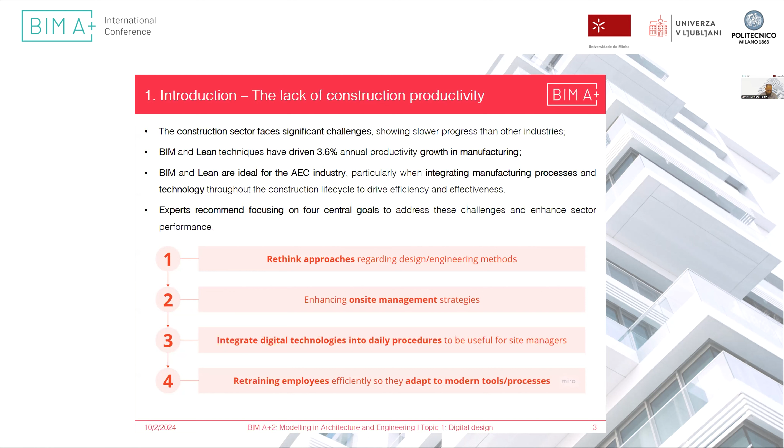Regarding the BIM approach and lean construction techniques, a keyword used in this dissertation is mainly constructability.

It is about integrating the 3 main constraints in our sector, which are quality, cost, and time, into our planning, our designing, and our execution projects.

Using constructability was the main approach I used to integrate these 3 main elements of the triangle that I used here.

The first is building information modeling integrated with the last planner system, or LPS. It is the approach used in site construction, and it also integrates building information modeling with the line of balance technique.

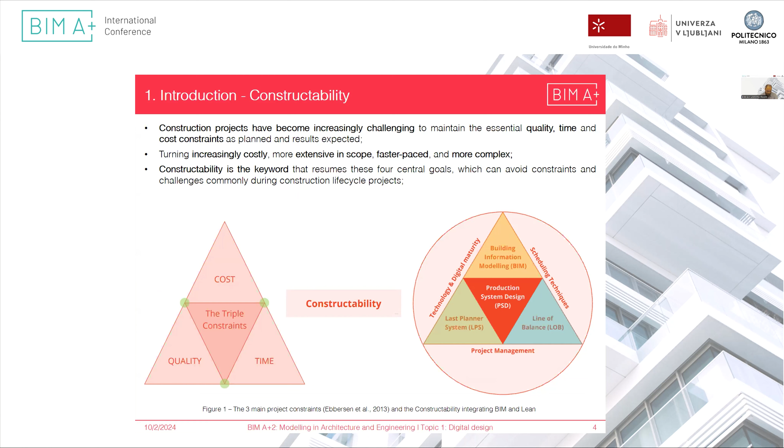So these integrations were designed as an approach understandable as a production system design here.

To start developing this dissertation, it was necessary to do the diagnostic and understand the motivation of the project.

The first reason is that the renewable energy sector has become the fastest growing power source, and the photovoltaic solar systems have been pioneers in production efficiency.

The combined use of BIM and Lean methodologies in solar panel projects offers substantial advantages, especially in our sector. The diagnosis that I did with the teams in site constructions resulted in this workflow system divided into 5 main points.

The first lack was the lack of effective use of visual management systems and tools. Solar panel design was still developed using CAD format and files.

This is not an issue in itself, but it is something regarding information, a lack of information in their attributes also.

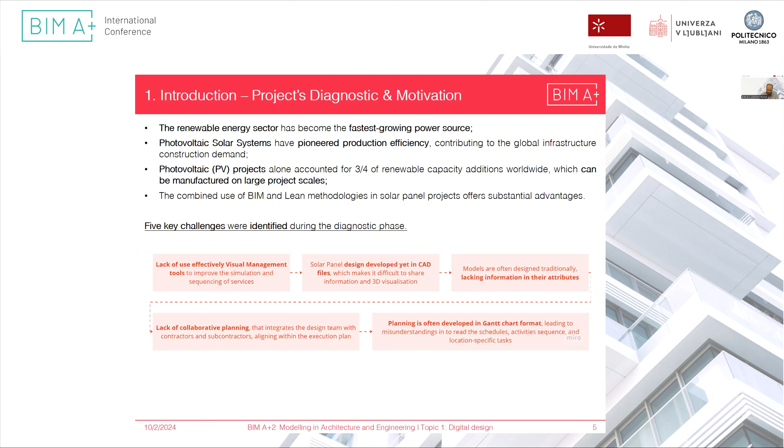The next point is the lack of collaborative planning, and the last one is that planning is often developed in the Gantt chart format, which is also not an issue itself, but...

...site construction managers take a while to understand the sequence of execution of the panels.

So I created the objectives for this dissertation. The first is to integrate BIM for simulations with project scheduling, enhancing productivity and execution of solar panels.

And to implement lean construction techniques in site construction also, retraining the site managers with daily and weekly routines.

Three main specific objectives were also developed: develop the production system design, including a comprehensive list of PSET codes organized by level and location.

What location? Because the construction is large, so it's necessary to divide the construction site into smaller pieces.

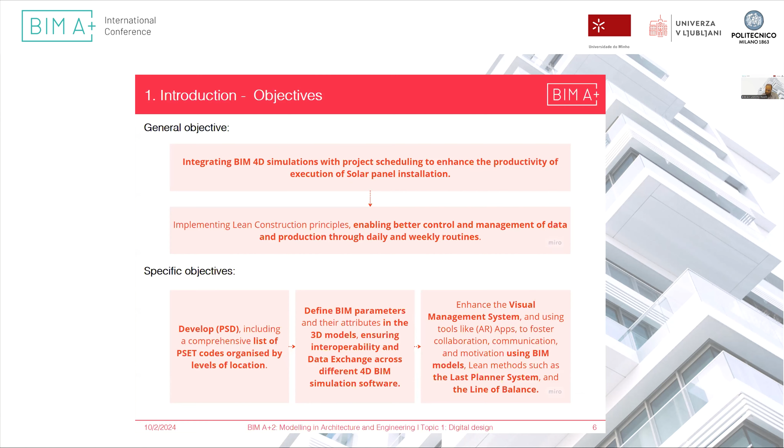The second one is defining BIM parameters, and the third one, enhancing the visual management and digitalization maturity. For the literature review, I found more than 100 documents regarding the integration of Lean and BIM, and 78 papers were used to develop my literature review here, to understand some arguments and gaps still appearing in our sector. Five keywords were used to maintain my dissertation: BIM 4D, lean construction, line balance, and solar panels.

The first approach that I use is the last planner system, as I said before. It is an approach to involve a team to be collaborative, not an individual - building a planning using the team, but not alone.

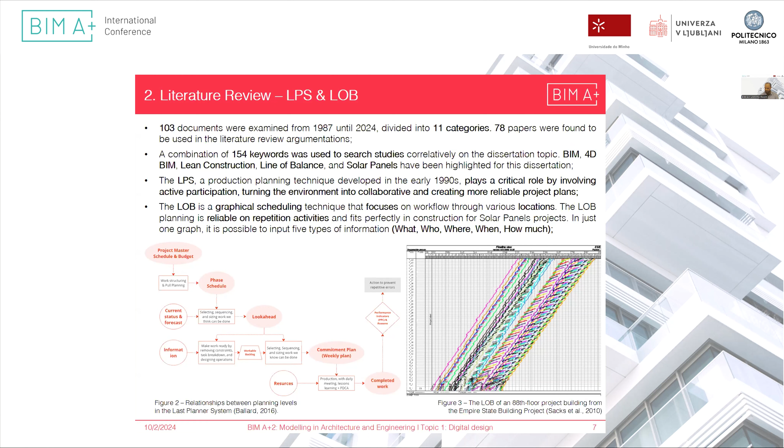The second approach was the line of balance, as you can see in the second picture. It is a graphical technique focusing on a workflow divided into locations. In just one graph you can understand the sequence of the executions on site, also the rhythm, and information about the quantities, who is doing those activities, and when.

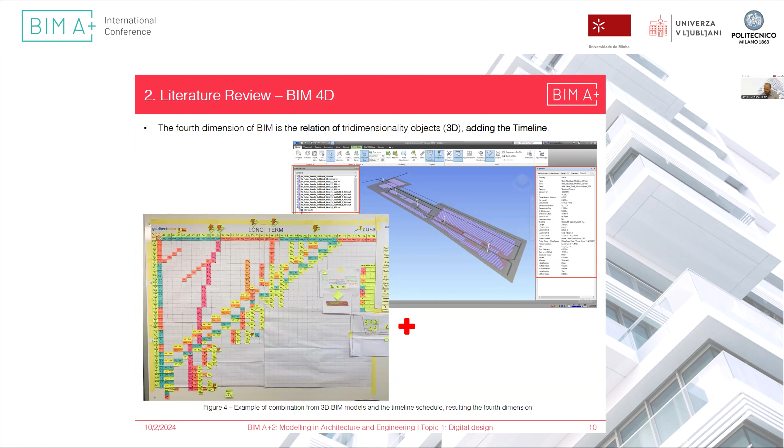About the literature review for BIM 4D: it is the relation of three-dimensionally BIM or 3D objects, adding timeline schedule. As you can see, we have the 3D BIM viewer here and the schedule here. It is the combination of those two approaches.

About the methodology: it was developed in 3 processes, divided into 4 phases. The first phase is the development of the PSD, regarding the development of the WBS, the duration of the executions, the sequence, the zones definition and planning. The second phase is regarding the development of BIM models, divided into 4 topics: modeling, detailing including the parameters and exchange data, and understanding parameterization and interoperability.

Phase 3 is regarding the development of 4D BIM - this is linking the 3D BIM model with the timeline schedule, including color codes in the objects, to understand the visualization and the sequence of execution of solar panels. And the last phase is the application in the site construction.

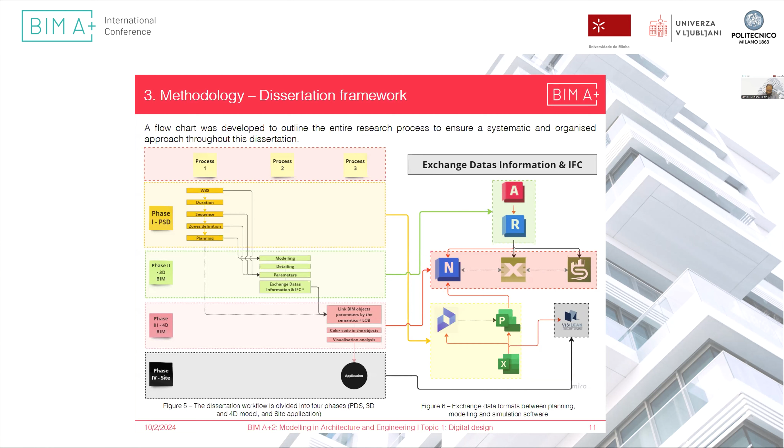In the second picture, we can see all of the software that I used in this dissertation: AutoCAD, Revit, Navisworks, Excel Manager, Synchro 4D Pro. For planning: Prevision, which is from Brazil, Microsoft Project, Excel, and the last one, VisiLean, which is project management software that we used after implementation.

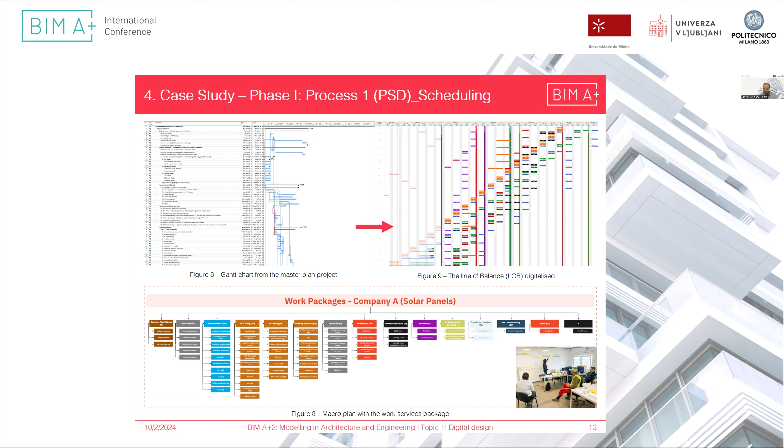The case study phase 1 is the development of the PSD, which included the scheduling. We took the Gantt chart and developed the line of balance to understand the difference between them. There are more than 100 lines in the Gantt chart, and then we put it into the line of balance in just 50 lines, as you can see here.

Then we did the workshop using the last planner techniques in the site construction. The main and key point of the last planner system is the collaboration - it is not only me doing the scheduling, but all of the teams.

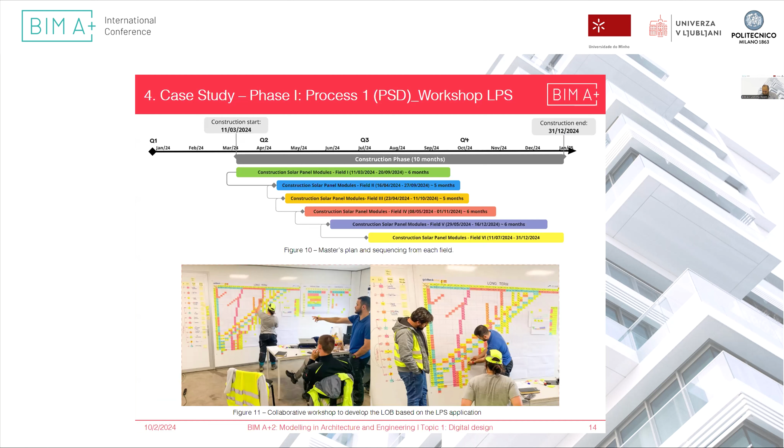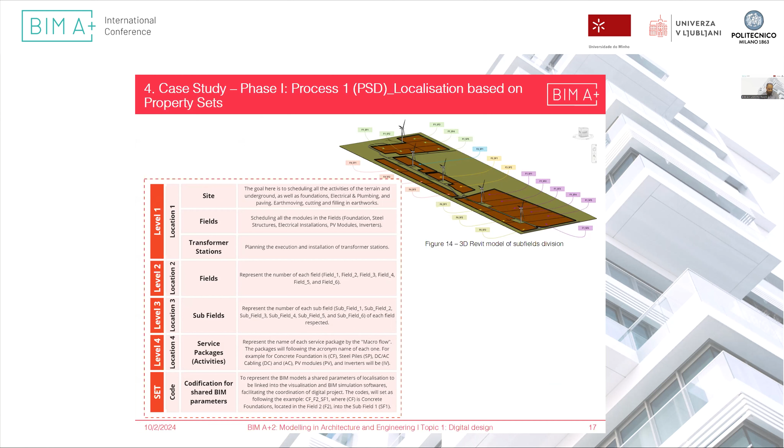After developing the line of balance and the sequence, we divided the site construction into small fields to understand it was reasonable and real. Then we started understanding the location to include in the PSET codes, divided by levels. Level 1 is about the site, the fields, and the transformer stations. Level 2 represents each field. Level 3 is the subfields. Level 4 is the service packages or the activities. And the last one is about the set codes.

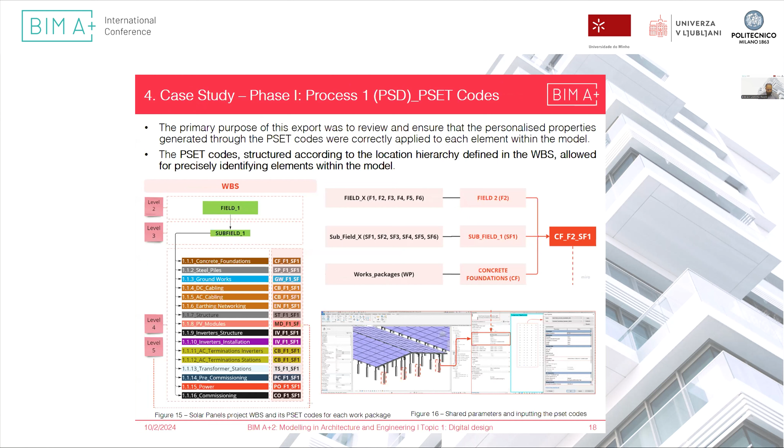So the PSET codes, after developing the WBS, each package has its own PSET code. For example, we have here CF F2 SF1, which means CF: concrete foundations, F2: field number 2, SF1: subfield number 1. This information was inputted in the BIM models in Revit.

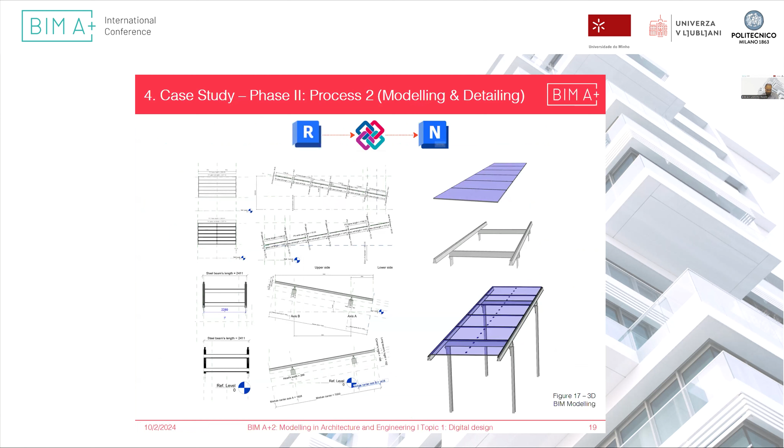In phase 2, we're doing the modeling and detailing of the solar panel project, with parameterizing, modeling and detailing. Here is the exchange and interoperability to understand the information we put in the PSET codes in Revit, and how it's organized so site managers can easily understand, just by clicking on the 3D BIM, the location where the solar panel will be executed or installed.

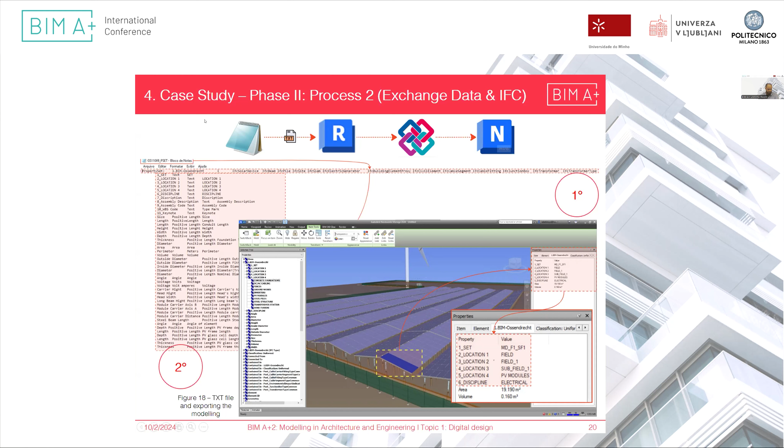This configuration was also used in the Notepad, exporting a TXT file, and after that, including the Revit file to export it as an IFC.

Process number 3 is auto-attaching using rules. The main point of the dissertation is not doing the linking between the 3D BIM models manually, but doing automation with just a few clicks using rules. We developed the simulation in Navisworks, and in just 10 minutes I did this with the site managers.

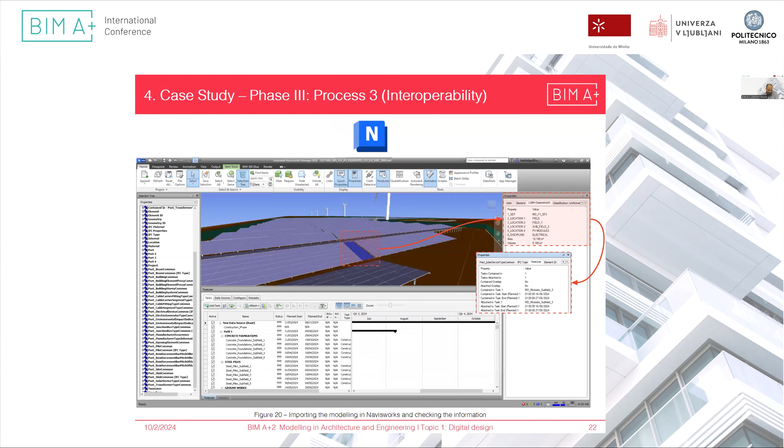Here it's about interoperability, to understand the information that was included in the BIM models, and how it still appears in the simulation software. This is from Navisworks.

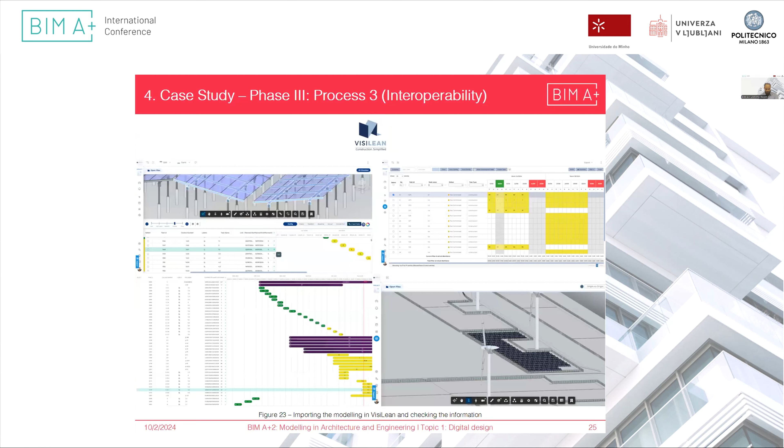And here it's from Synchro Pro 4D. Here is from Bexel Manager also. And the last is in VisiLean Construction Simplified, for the project management system.

Here we have the simulation developed for the site managers. We also developed virtual reality applications for installing solar panels, helping the workers understand the location of each solar panel and each module.

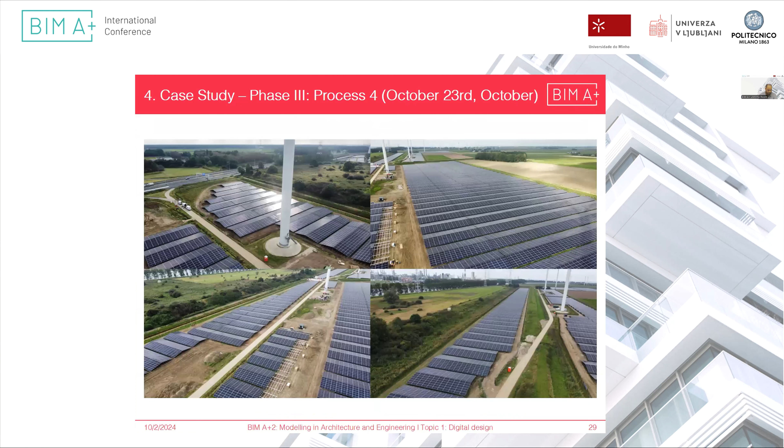Here are some pictures regarding the workshops that we developed. It was developed on site over 2-3 consecutive weeks, and the director was also involved, which was really important. These are the 4 pictures we took last week, showing the development and installation of solar panels — it was really incredible because it was on time.

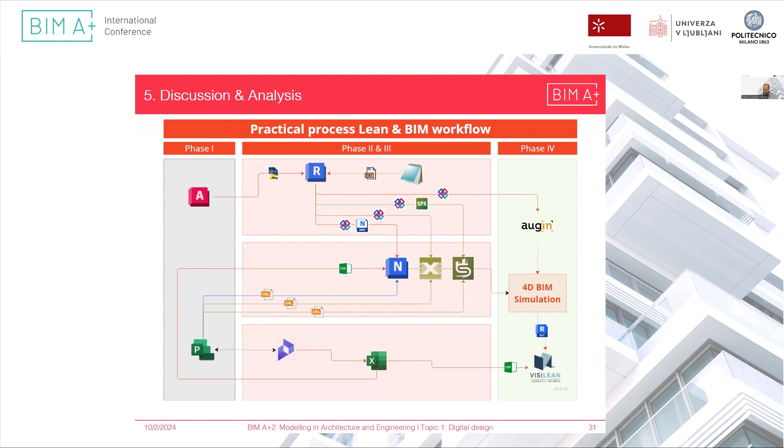The last one is the workflow that I developed with the project team. This is really helpful for them to understand the interoperability and exchange of format files, because these companies didn't have any prior file regarding BIM. It was the first project we developed using BIM techniques.

As a conclusion, firstly is about the 4D BIM impact on execution, which is incredible because the simulation enhances the productivity of the workers, implementing more than 900 to 1,400 modules daily.

With the simulation, it enhances understanding and visualization of each component of the modules. Parameters: early establishment of shared parameters, so now the company has parameters that are cohesive for the 4D models. The third one is synergy between BIM and Lean — BIM contributed to enhancing the visual management system and better planning.

Also, the Lean principles help optimize the internal process and reduce waste. As I said, they increased productivity to more than 1,000 installed daily, improving organizational efficiency.

What's really important here is that not all Lean techniques or BIM approaches are necessary for this type of project. For this project, some of them were used, like, as I said, for Lean-based it's regarding LPS and LOB.

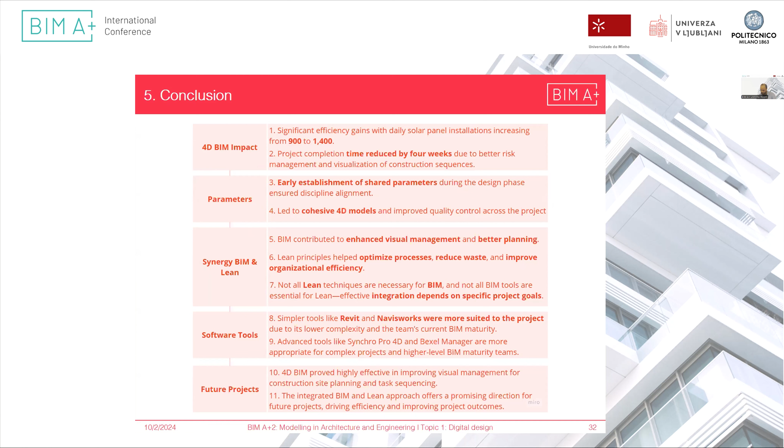And for the BIM side, it's for the BIM simulation, and software tools — simpler tools like Revit and Navisworks were more suitable for this type of project and its BIM maturity level. Synchro Pro and Bexel Manager were not implemented because we understood this was for the next level of digitalization maturity.